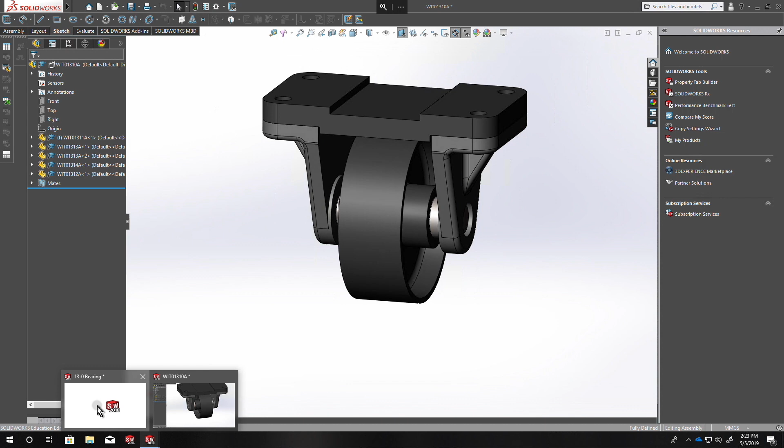Oops, that's not what I wanted. Oops, don't want that. Okay.

So the first thing I want to show is the tangency constraint in DimXpert. So far I have not found a better way of doing this, but this way seemed to work. It's a little clunky, but it actually did what I wanted it to do.

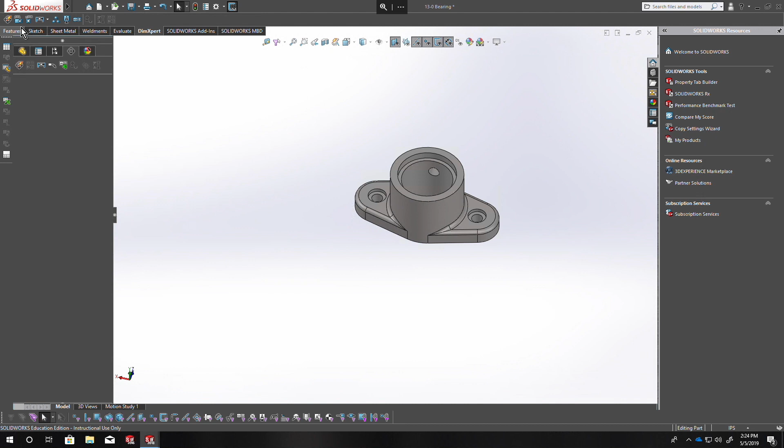So I'm just going to use the location dimension a couple of times here. I'm going to go from this surface to this surface, place, there, place. I'm just going to keep going around this thing with these dimensions. I'm going to delete them once I'm done with this, and I'll show you what it does for me. And I think I need one more there.

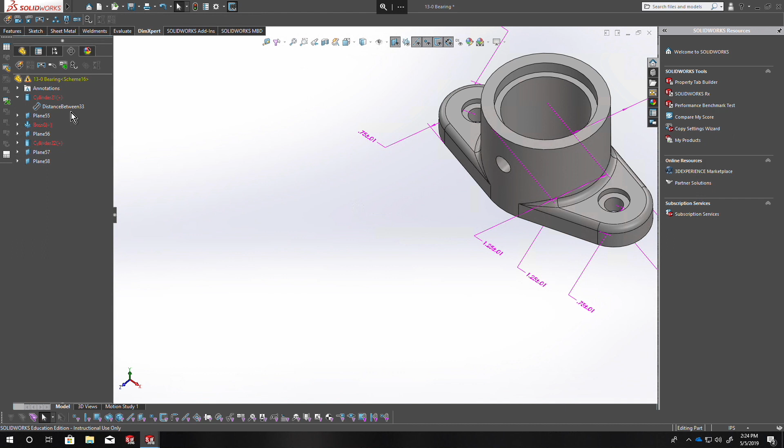Okay, so you see it's overconstrained. Any of the distance dimensions I want to delete, and I'll show you what it leaves behind. Hopefully that didn't delete everything. Nope. So on our planes now we have these tangency constraints on there.

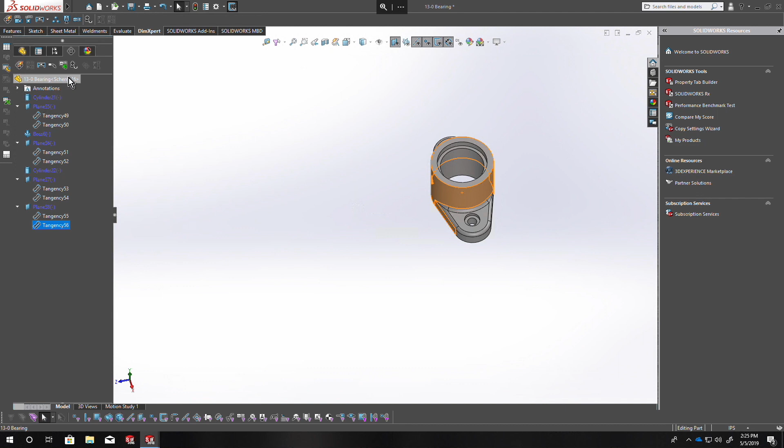If you can find how to apply those without doing what I just did, please share. As far as I can tell, I cannot see any button that seems to do that. So that's a method to accomplish that if you ever run across a part that has tangency on it.

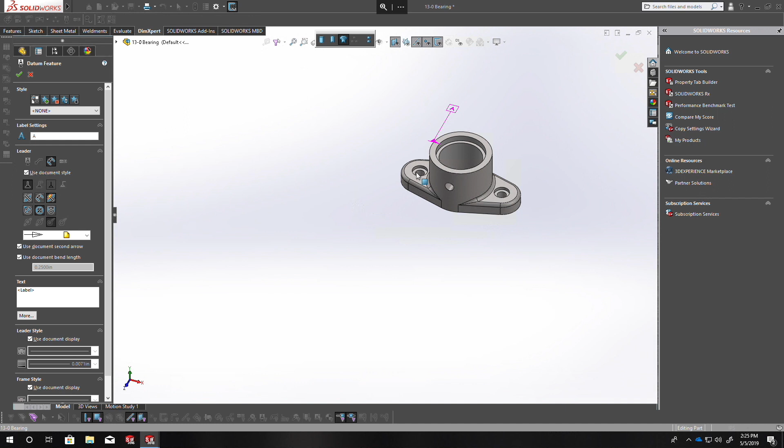So now we should have a lot of yellow. Alright, my first step here is I'm going to apply some datums. Let's use this main hole here as a datum and the bottom surface as a datum. And then check. That's good.

Now I've been using, for the past several parts we've done, mostly location dimensions, but now that we're getting into the position tolerance, the size dimension actually is pretty strong. So I'm going to start throwing this on a bunch of spots.

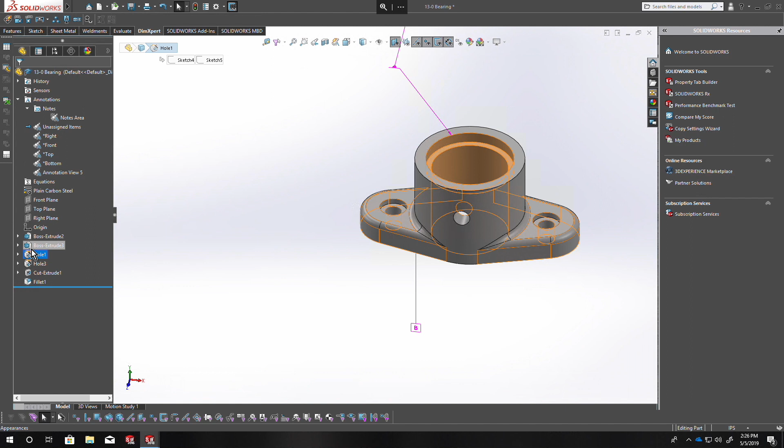So as you see, before I even start that, I believe on this part I use the hole tool. So these each are countersunk, counter bore holes. So when I click on size with these, it actually selects the whole thing and applies all the information for that counter bore. And because I did this one in one hole feature, it selects both holes and puts that 2x on there.

Change the precision so it's 3 decimals to show the 0.375. That one's good. Let's see here, I'm going to do size on this guy, size on this guy, and then size on this one.

But before I do that one, I want to use the pattern feature. So it's this one and yep, that one. By selecting those two, click on pattern. Oh, I guess that didn't really work, but it says cylinder 22 and cylinder 21, which were on the list here, but now they've been moved into this pattern.

By doing that, now I just click on size, and it's grabbing both of them for me. Okay, so now we should have a little more green in there.

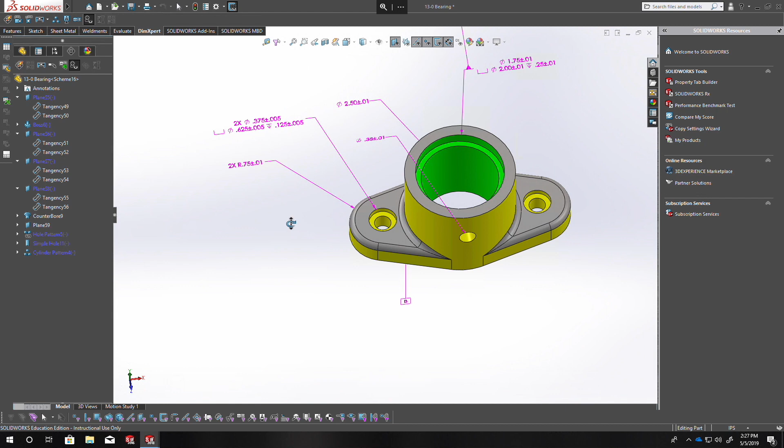Let's start applying our position tolerance to things. So this is our datum A. I want a position tolerance on this outer bore, or boss, with a position to datum A.

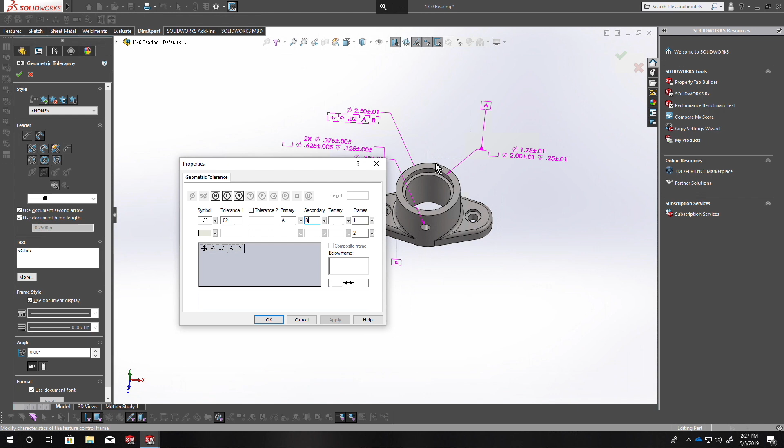I'm going to click on our geometric tolerance, click position. For our uses right now, we don't really need to get into what type of tolerance we want, but I want this to have a tolerance of 0.02 to datum A with reference to datum A and datum B. So it's going to be perpendicular to B and basically share the same center point as A. I'm going to click on that surface, position it.

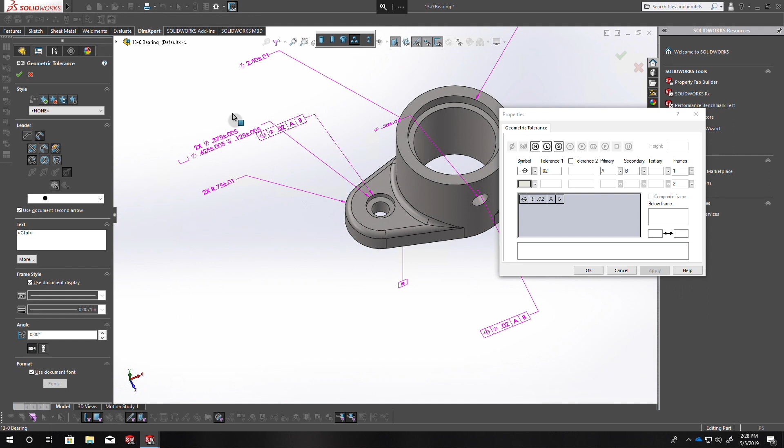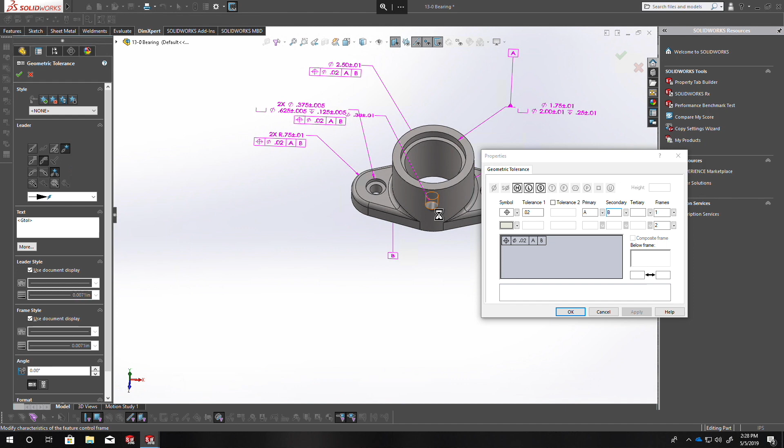I want it on this one and this one. Okay, actually I probably could have done one more of those, this one here. Same thing, diameter symbol, A and B, on this guy. Place it.

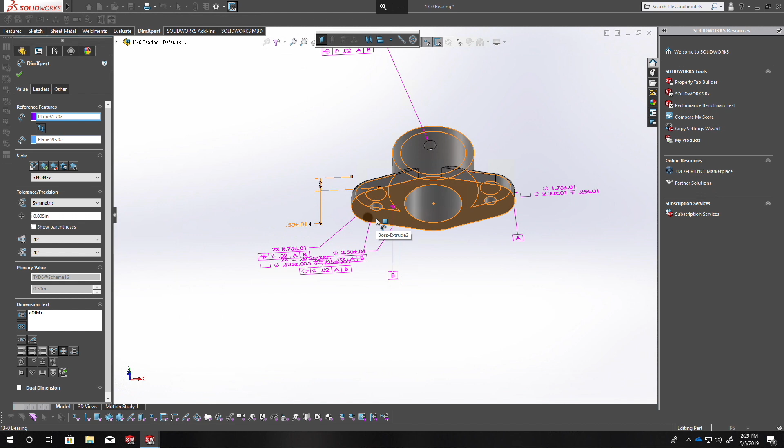Now we're mostly green. Now we just have to do some height dimensions. Click on the bottom surface up to here, but I want it coplanar so it gets both sides. Compound plane, not coplanar. And then I want from the very top down to B.

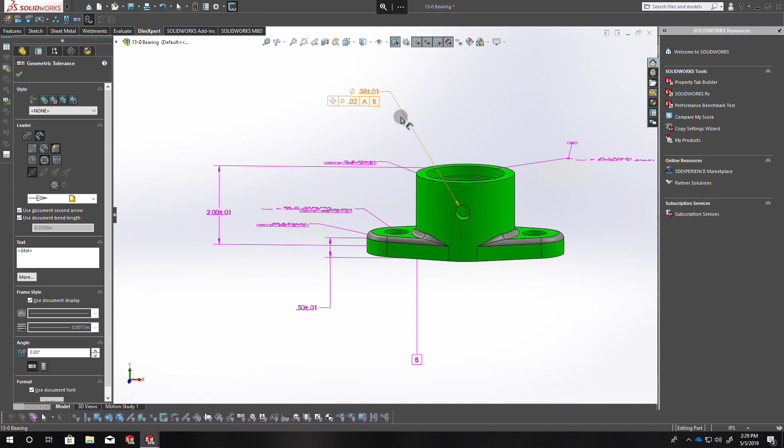I think there was one. Oh no, the last bit is going to be some basic dimensions. I believe that's all of them. Yep, so we should have green on the top. Okay, so it's going to be green without those basic dimensions, but we still need to have that to tell whoever's making this part where the true position of that hole would be.

So I'm going to go to basic dimension, bottom hole, place it there, and then I need it for here to out here. I suppose I could put another one over there, but let's do that. There we go.

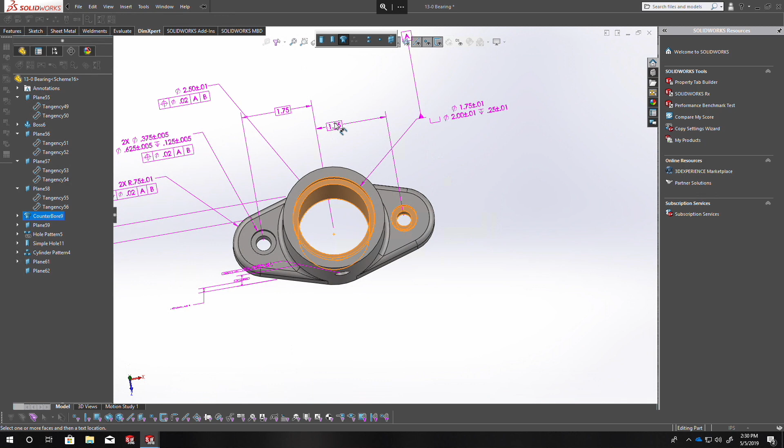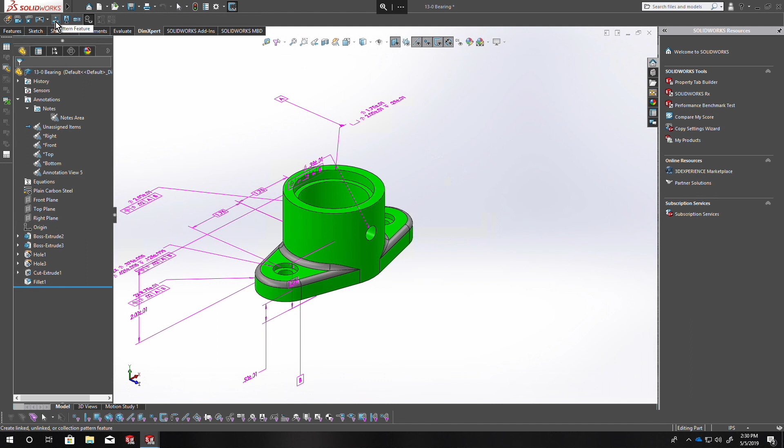Now the last thing should be is those fillets. So if I click on show, it's only gray on the fillets. Because I did all my fillets as one feature, if you did it more, you probably can group them together with this pattern feature and have this do the same thing. So I'm going to click on size, click on this fillet, and place my dimension.

Check, part is fully green. So we can go in there, apply more form tolerances or orientation tolerances beneath the position to refine that. I'm not really going to require that because I think that's kind of easily understood at this point.

So in the end, what I'm looking for, you'll use a lot of this position. It seems to be one of the more common tolerancing types you're going to want to use. But for like that axle, maybe consider using run out when you get to that point in the quizzes.

He talks about concentricity and symmetry, about basically never using those except for very specific situations. So I'm going to take his word on that and basically say don't use those two. Profile, probably can use on the wheel itself.

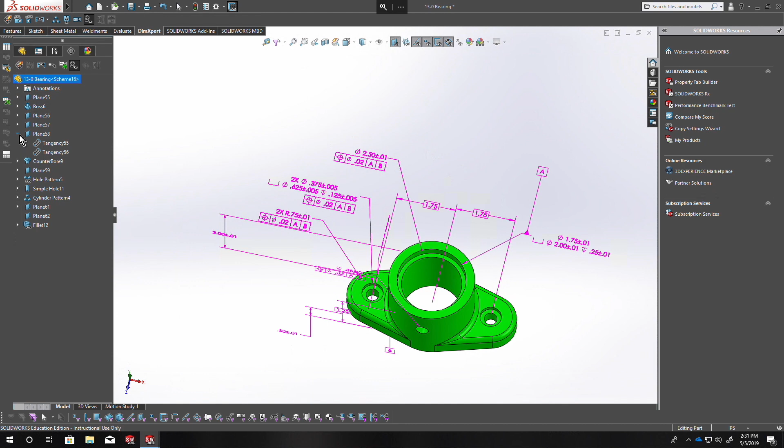So as you do these parts and apply your DimXpert to it, communicate with me and each other, share ideas. As you show them to me, maybe I'll say maybe you could do it this way or that way. But that's how we're going to finish out this week. If we have extra time, we might throw this tutorial assembly into the mix too. Well, we'll see how the week goes, but that's the plan for the week.